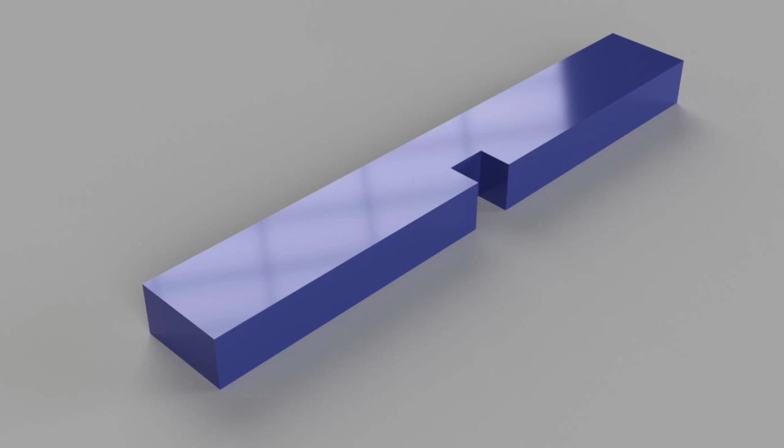Before we start modeling, let's get things organized by creating a project folder. To create a project folder, let's head to our data panel. The data panel allows us to access, organize, and share Fusion 360 projects and design data. The files accessible from the web browser are also reflected here.

Let's now select New Project, and let's name this ASCII-machine-vise. Hitting enter. To enter the folder, simply double left click. We haven't created anything yet, that's why this is empty. Let's now minimize our data panel.

Let's start off by creating the simple parts. We will be working in units of inches, and before we begin, let's tweak our preferences. I'm going to head to my profile, selecting my name under preferences. Let's head to default units under design, and let's change this to inch. In addition, let's head to unit and value display.

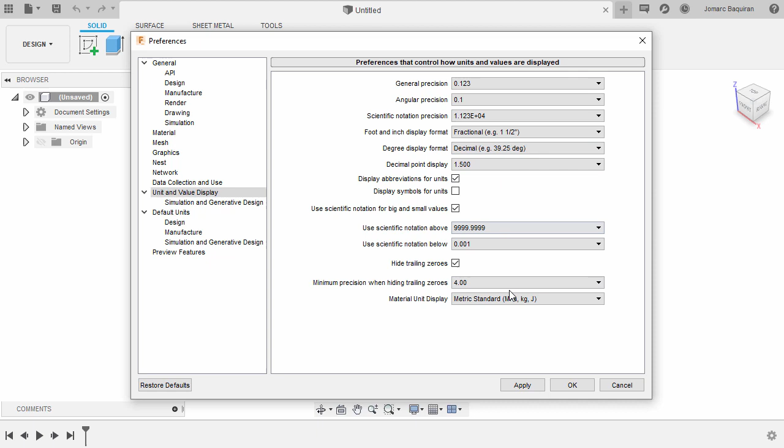Under foot and inch display format, let's change this to fractional. Heading to apply and selecting OK. Lastly, under document settings, let's change the units to inch. Notice our chosen unit type is now set as default. Selecting OK.

Before we can extrude anything, we need to create a sketch. Now I prefer to sketch on our XZ plane. So heading to Origin, selecting XZ. From here, I can right click and select Create Sketch.

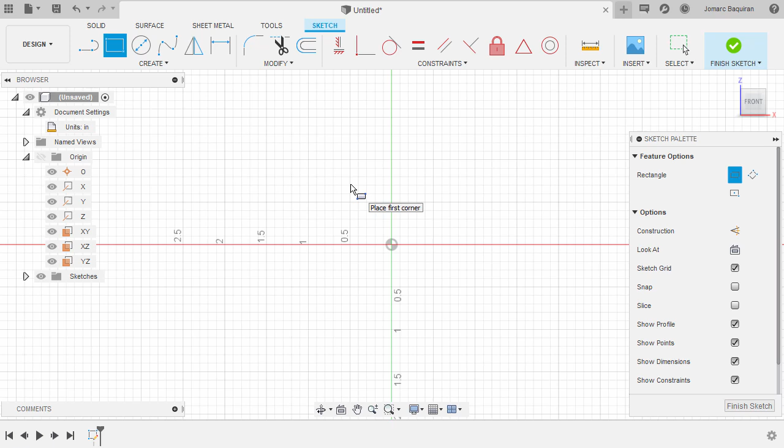Let's create a rectangle. The shortcut key for that is hitting R. As a quick tip, make it a habit to center your geometry with respect to our origin. The origin, which is this, being our 0, x, y, z. To have our origin at the center of our rectangle, let me change our rectangle under feature options to center rectangle. Let's now drop our center point at the origin.

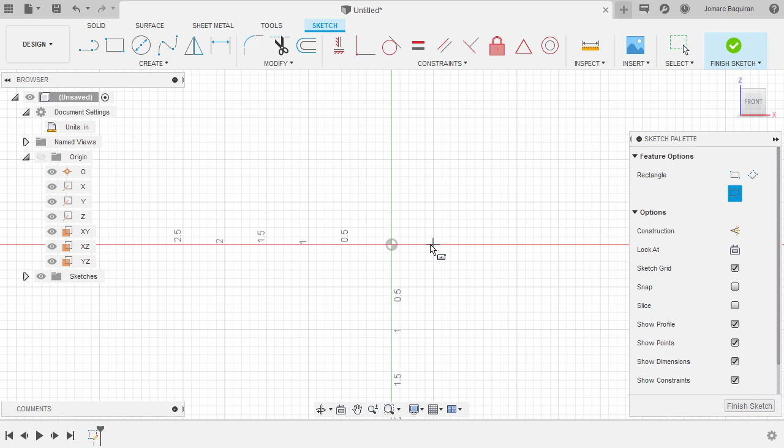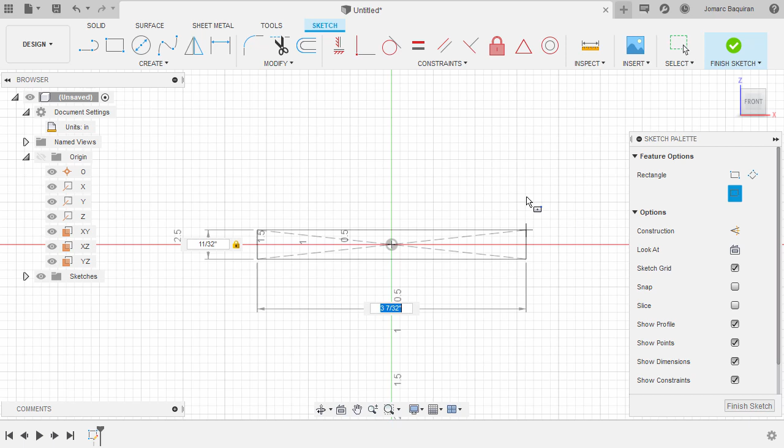Notice the dimension on the left is currently highlighted. With that, I can input a value. Let's key in 11/32. I'm going to hit tab, key in 2 space 5/16, hitting enter.

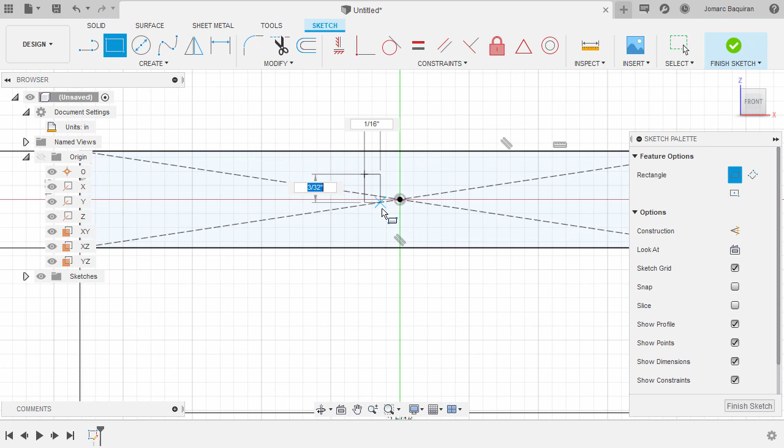Let's zoom in and create another rectangle here. So hitting R, and this time I will be using a 2-point rectangle. Zooming in, left click here, and left click at the intersection. In addition, I want our newly created rectangle aligned vertically to our origin.

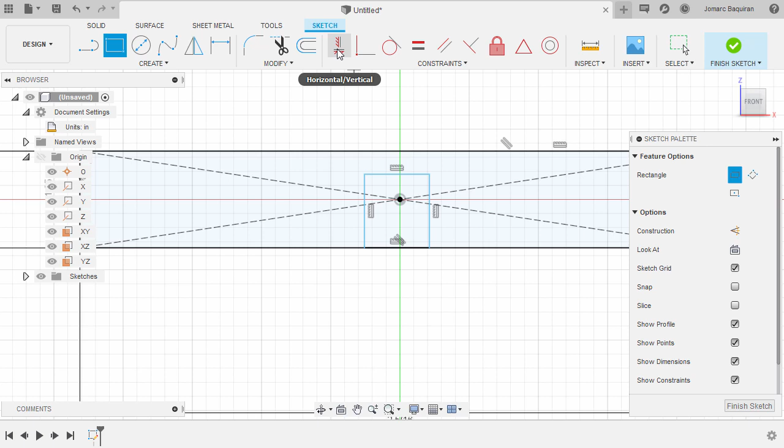Let's now grab our vertical constraint. I'm going to hold shift and locate the midpoint of this top horizontal line. So holding shift, left click, holding shift once more, and locating the midpoint of this horizontal line. Holding shift and left click. Notice their midpoints are now aligned vertically.

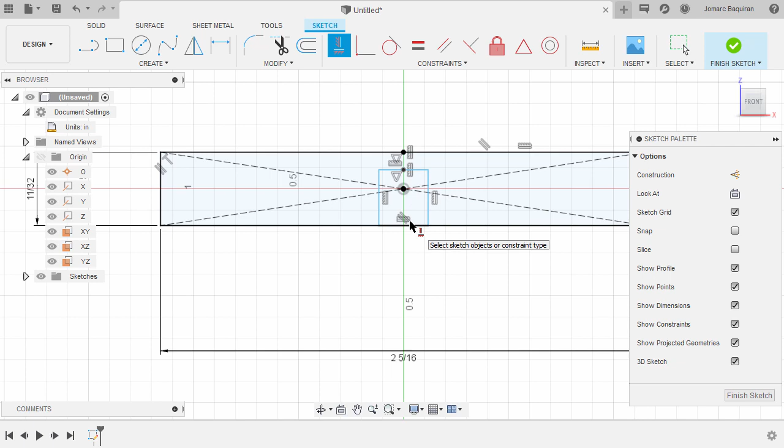Let's now hit D to grab our dimension, selecting this horizontal line. Let me drop our dimension here. Key in 3/16, hitting enter.

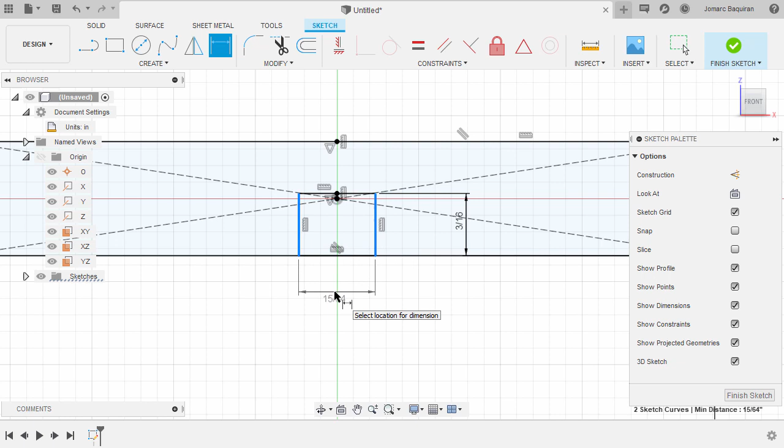Next, selecting this vertical line, place our dimension here, and key in 5/32. Hitting enter. Notice that our entities are now colored black, meaning they are fully defined. Fully defined, in addition, means I cannot move our entities anymore. So notice as I left click and hold, they're not moving.

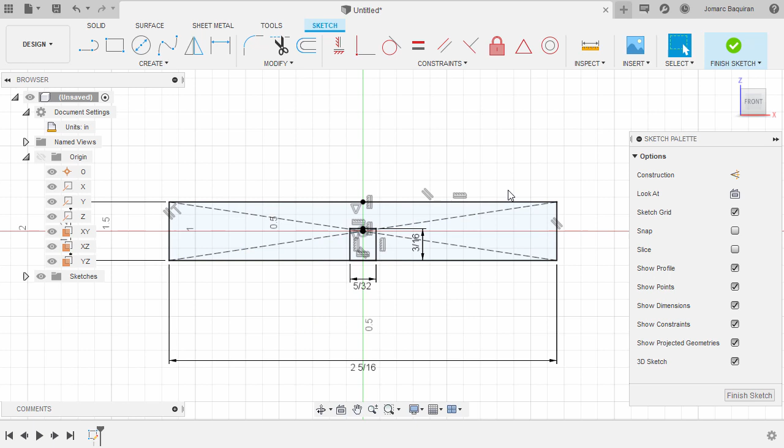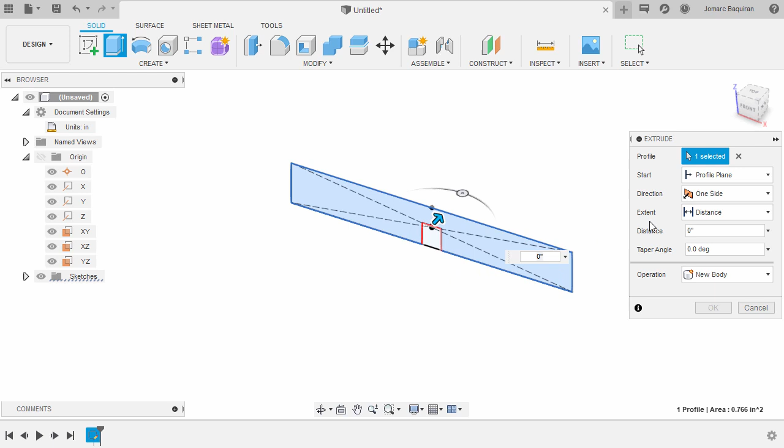From here, we can now grab our extrude tool. So let's select finish sketch, heading up to solid, selecting extrude, selecting this profile, left click, once more making our origin at the center of our geometry. So I'm going to change the direction to symmetric. I'm going to pull this arrow, giving this a thickness.

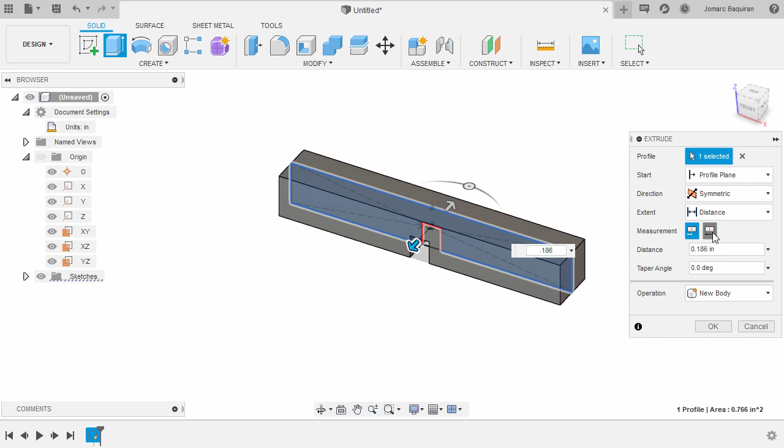To be exact, I'm going to key in 0.186 inch. In addition, let's change the measurement to whole length, Operation to New Body, and hit OK. So we now have our first component.

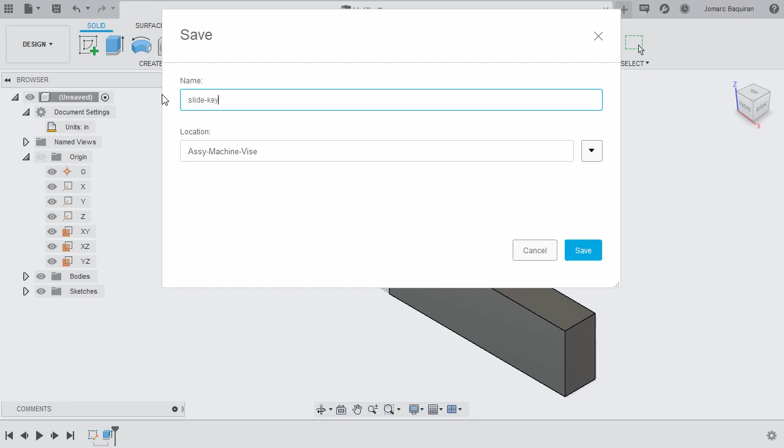Let's now save this file into our project folder. Heading up, selecting save. So take note of the location. I'm going to name this slide-key. Selecting save. File now saved into the cloud.

Let's take a look at our data panel. So here it is. Join me in the next lesson as we create the next component, which is the special key.